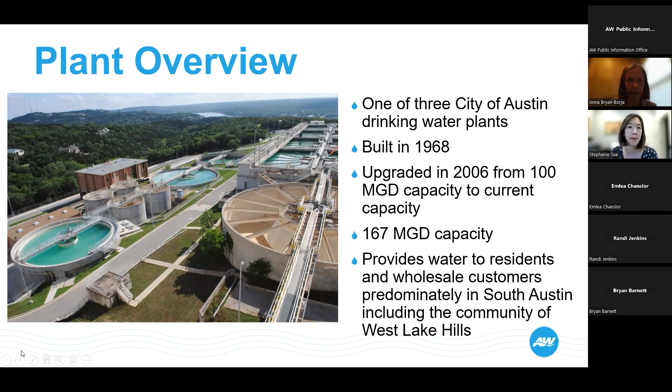So, a quick basin cleaning update. As you'll recall, this is an annual activity that we're conducting on our basins. Our goal is to clean each basin once every 3 years. It's really critical to our operation in that it allows us to ensure that our treatment capability and capacity is upheld, and that the equipment critical to the treatment process is cleaned on a regular basis, so we can use our equipment to its highest capacity.

This is required because we are a lime softening plant. We add lime to our process, and calcium carbonate actually accumulates on our mechanical equipment, and it can harden and get thick. So our goal is to continue to maintain it regularly and clean the basins frequently so that we're able to maintain our treatment capability.

Last year, we cleaned basins 1 and 2. That was at our last meeting with the community out at Ullrich, back in October, before we started cleaning Basin 2. We successfully completed cleaning of those 2 basins.

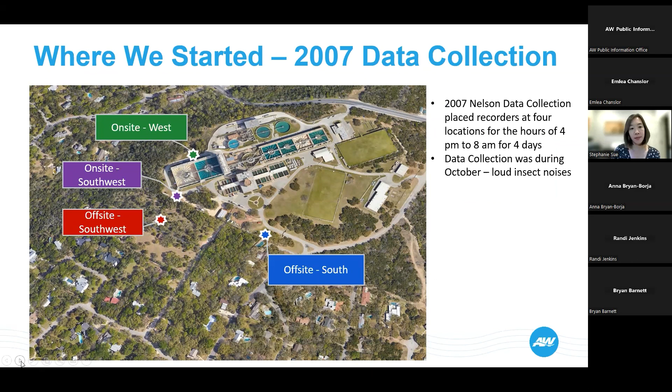4 days of data were collected from the hours of 4 p.m. to 8 a.m. back in 2007. This data collection was done in October, a slightly different time of year than the current study, and consequently there were quite a bit of insect noises that weren't present during the November study we did.

In addition to the 4 original locations, we added additional spot readings further into the neighborhood. This was to help capture a better picture of how sound was propagating throughout the residences in this area. 3 locations are shown, although many more areas were recorded and provided in that report.

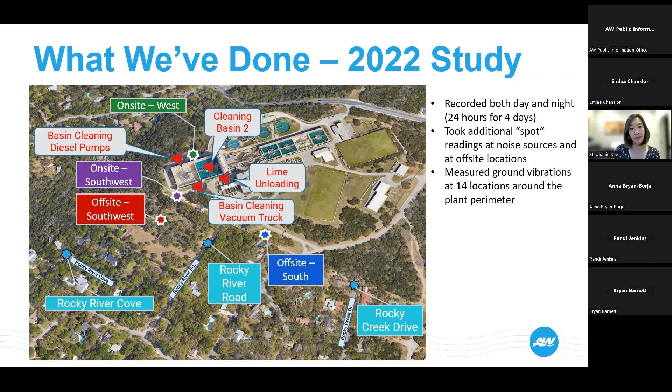We knew there were certain sources of noise due to complaints, so we targeted recording the sources of those sounds. As Stephanie mentioned, there was basin cleaning equipment that we purposefully located on a different side of the facility than previously, but we still recorded the sounds at those equipment locations. There's also corresponding equipment called a vacuum truck that removes the material pulled off or blasted off by the power washing, and we recorded the sounds produced while cleaning basin 2 from up top in the basin.

The only non-basin cleaning point source we recorded was a lime unloading process, both with and without the outdoor truck blower. All that information is conveyed to you in the report, which is more than what we had in the '07 study.

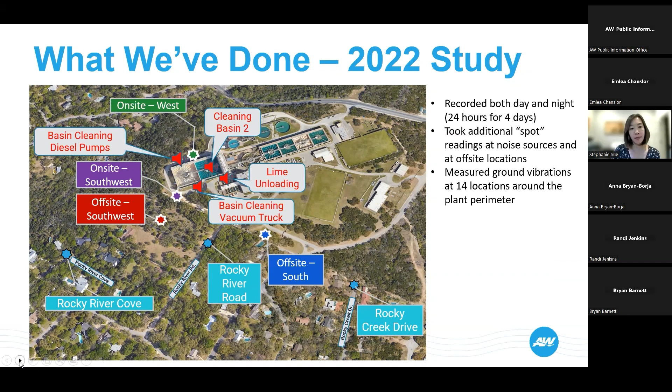So where we're going with all of this is collecting that data was step 1. Step 2 is creating a 3-dimensional model of the plant and simulating how that sound propagates. This model will allow us to test virtually different mitigation techniques so that we can find the most effective ones and prove to you that these activities should be helpful in reducing our impact.

And then finally, we're going to produce a final report that not only summarizes the noise data that we've collected, but also the recommendations for us. Those might be a mixture of operational changes or capital improvement project changes. So with that, I'll turn it over to the modeling team.

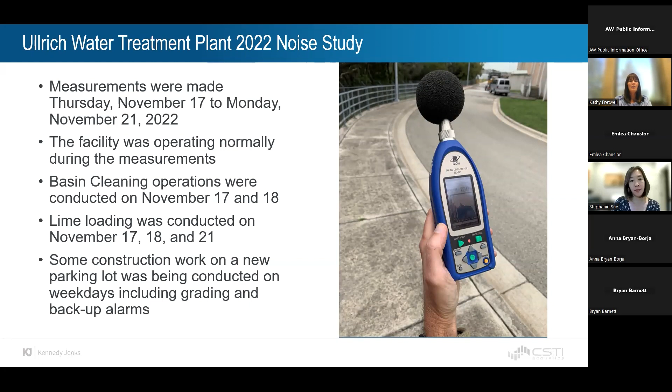Now I'm going to turn over the presentation to Arno to talk more in depth with you about sound.

Hello. I'd like to start with talking a little bit about the physics and definitions of sound. Sound consists of propagating variations in air pressure that occur at different frequencies and amplitudes. The frequencies are measured in hertz, and the amplitude or volume is measured in decibels or dB. The A-weighted sound level is abbreviated as dBA, and that's a single number rating of the loudness of sound at all frequencies and is used in many noise ordinances.

Sound levels often vary over time, and this can be described by measures such as the maximum level, Lmax, minimum level, Lmin, or equivalent average level, LEQ. Typical sound levels can range from a whisper at 30 dBA to a loud dance hall club at over 100 dBA.

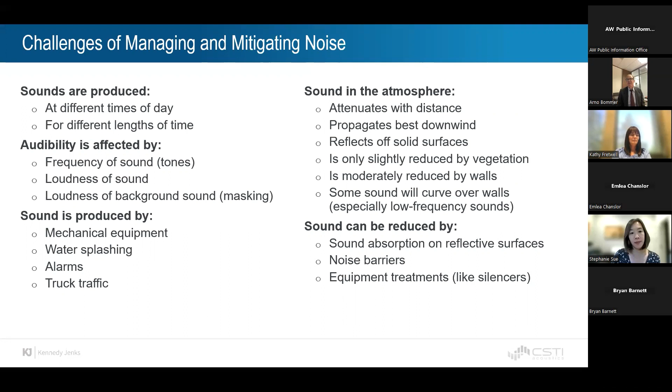People perceive sounds in different ways depending on factors such as the time of day, the presence of tones, the loudness of the sound, and the loudness relative to the background sound. Sounds at the Ullrich site are produced by a variety of sources such as mechanical equipment, water splashing, alarms, and truck traffic. Sound levels in the community are affected by the distance from the equipment, wind conditions, reflections, and walls. Sound can be reduced by sound absorption, noise barriers, and treatments to equipment like silencers.

The Ullrich Water Treatment Plant is located within the Austin city limits and shares a property line to the northwest and the southwest with the city of West Lake Hills. The nearest residents to the plant are within the city of West Lake Hills. Austin Water owns the buffer property outlined in blue dashes within the city limits of West Lake Hills.

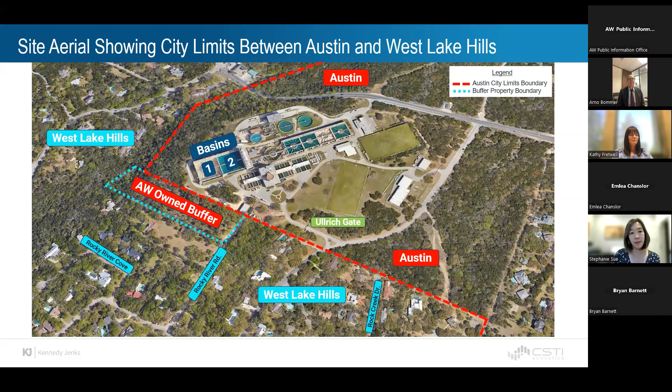For noise criteria, the Texas state noise limit is a decibel limit level of 85. The City of Austin's Code of Ordinance states that the noise level of mechanical equipment may not exceed 70 dBA at the property line. We were unable to compare sounds from the treatment plant with the City of West Lake Hills criteria, as the ordinance uses frequency bands that cannot be measured with modern calibrated sound level meters.

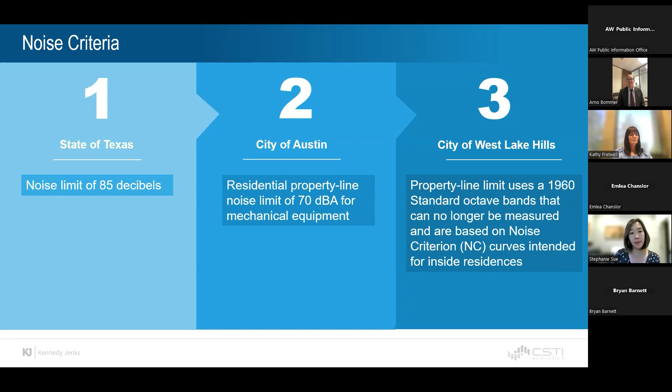Several sources of noise have been identified during normal operations at the Ullrich plant. Small motors are used for basin mixing and stirring and for water transfer pumps. Basin discharge waterfalls produce a flowing water noise. Noise impacts from transportation sources include trucks that arrive to deliver lime and remove sludge from the facility on a regular basis. Some vehicles in operations are equipped with backup alarms that periodically sound.

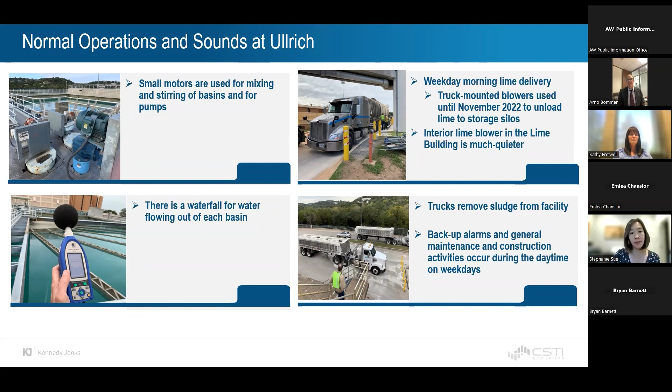Routine maintenance and ongoing construction activities occur during the daytime hours on weekdays. Transformers and HVAC equipment also produce noise during operations. Through the treatment process, lime scale accumulates within the basin and on basin surfaces.

To maintain operations of the system, each basin requires periodic cleaning conducted by a specialized contractor to remove lime scale. The pictures shown here highlight the process for basin cleaning. Contractors spray water at high pressure to remove the lime scale. The equipment is shown in the lower left.

The water is pressurized with diesel-powered pumps, with up to 4 pumps running at a time, shown in the center. The water and scale residue are then pumped from the bottom of the basin using a truck-mounted vacuum, shown on the right.

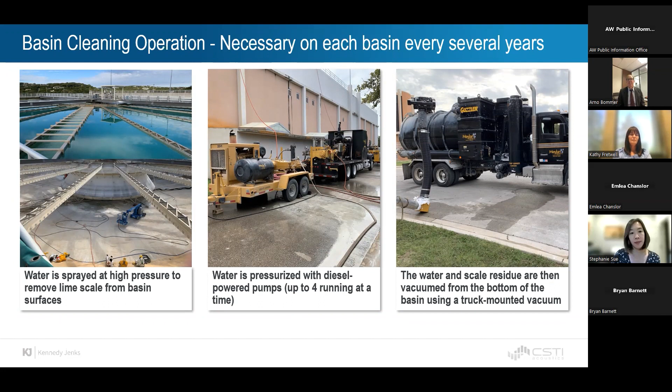The sound monitoring was conducted at the same locations as the previous study. On-site west is north of Basin 2, near the diesel pumps used for basin cleaning. On-site southwest is near the fence by Basin 1. Off-site south is near the Ullrich Gate, and off-site southwest is located in the Austin Water-owned buffer property.

For the 2022 study, we completed continuous sound monitoring measurements at these 4 sites for 24 hours per day for 4 days, in comparison to only nighttime hours from the 2007 data collection.

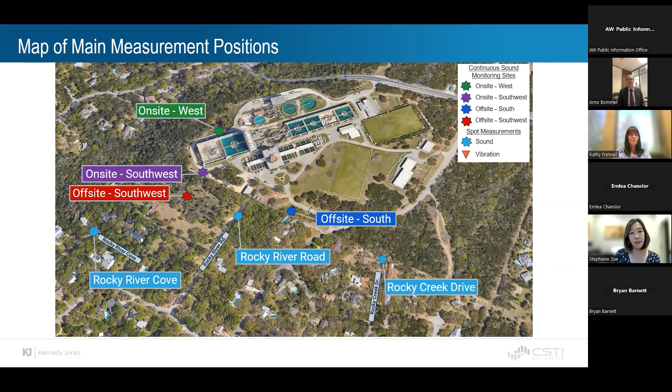Additionally, spot measurements were made, including off-site positions at Rocky River Road, Rocky River Cove, and Rocky Creek Drive, shown in light blue. Ground vibration levels were measured at 14 positions around the property line of the site to assess possible vibration impacts. This is shown with the red triangles.

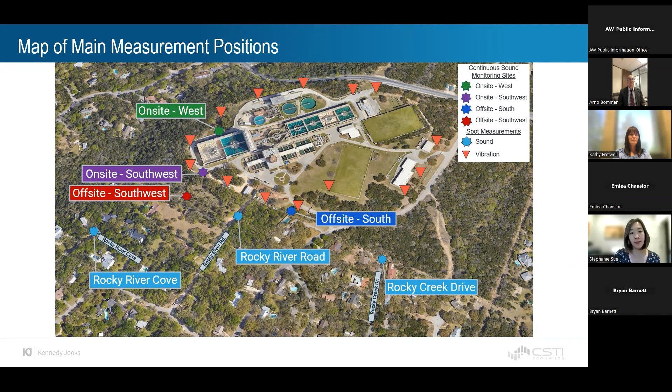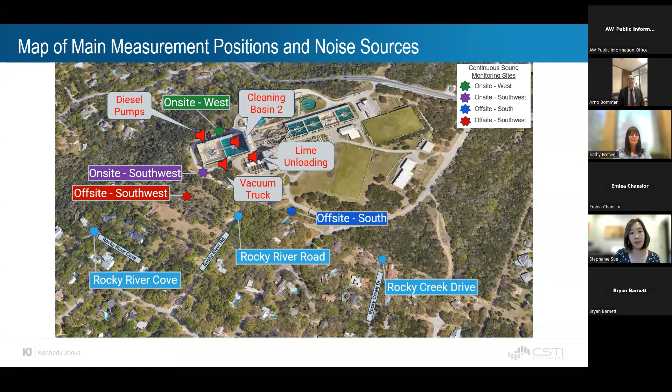The loudest sound sources measured during the 2022 study were all near cleaning Basin 2. These included diesel pumps for the basin cleaning, high pressure spraying to clean Basin 2, the vacuum pump for the basin cleaning, and lime unloading, which is the only operation unrelated to basin cleaning.

We measured lime loading operations conducted with the original process using a truck-mounted blower, and with the current process using a blower inside a building.

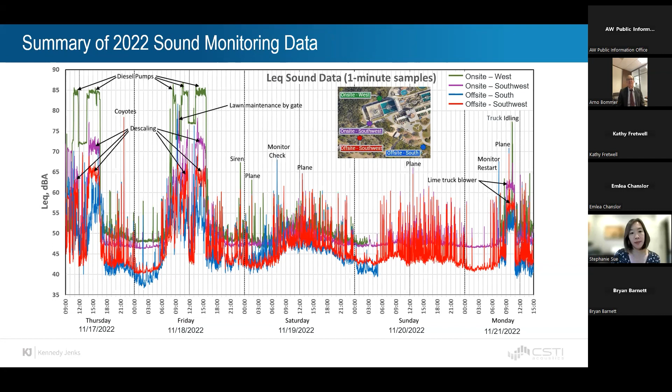On the right of the graph, you can see sound levels from testing with the blower on the lime truck. As shown with the red line, it produced a sound level of about 57 dBA in the buffer property. When there are no sounds from basin cleaning or truck lime loading, and when the brief spikes from planes and sirens are excluded, the sound levels at all 4 locations are typically 50 dBA or below.

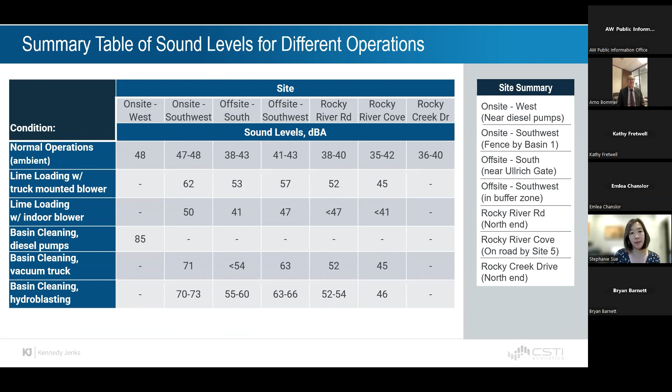As previously noted, the 2007 data was for nighttime only, from 4 p.m. to 8 a.m. each night, and was collected in October when there was insect noise at night. In 2022, data was collected continuously to cover both day and night in November during cool weather without insect noise, and included normal operations and basin cleaning operations. During normal operations, without insects or planes, sound levels at the four monitoring locations were similar for 2007 and 2022.

This figure shows the sound levels measured along Rocky River Road and Rocky River Cove during basin cleaning operations. Sound levels range from 46 to 56 dBA and generally decrease with greater distance from Ullrich. Sound levels may also decrease due to shielding from buildings and topography. There are some effects from foliage and ground absorption, but these are normally minor.

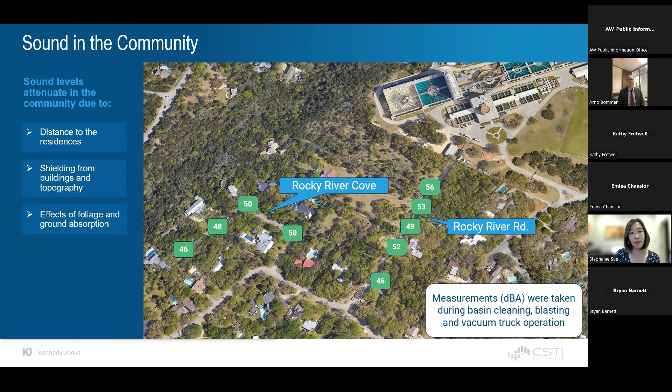Here we show the difference between sound levels 30 feet from equipment and the level measured at the monitor in the buffer area. There's a decrease of at least 27 dBA for each event, corresponding to over an 80% reduction in perceptible sound. Additionally, the indoor lime blower reduced noise from the lime truck unloading operation by about 10 dBA compared to the truck-mounted blower. Functionally, this represents a 50% reduction in perceptible sound and a 90% reduction in sound energy.

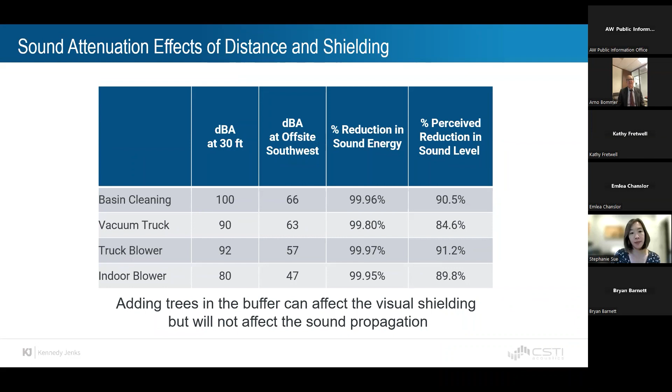Next, we're going to talk about vibration. The City of Austin's Code of Ordinance states that earthborne vibration may not exceed the limits shown in the right-hand table at the residential area boundary line. The City of West Lake Hills Code of Ordinance limits any vibration to 0.002 G's peak measured at any point beyond the lot line.

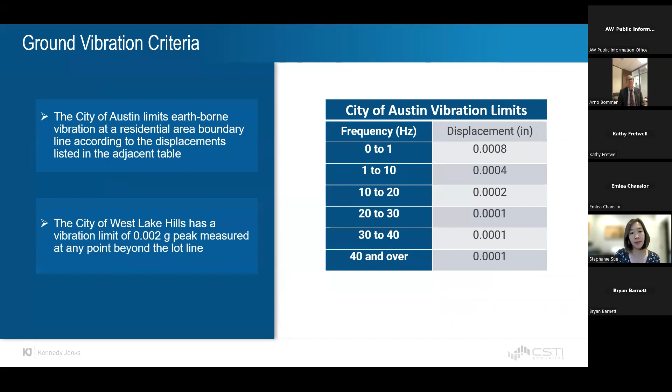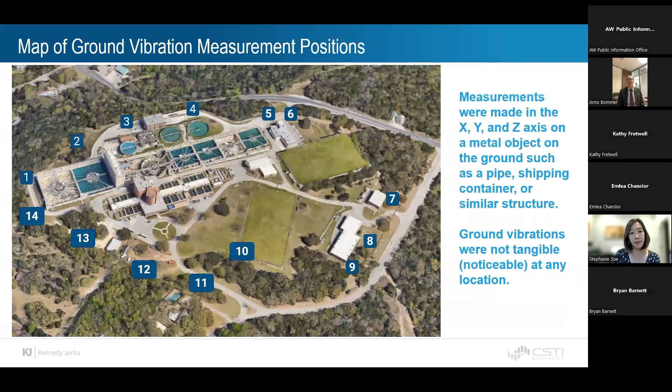Ground vibration levels were measured at 14 positions around the property line of the site to assess possible vibration impacts in the vicinity. Measurements were made in the X, Y, and Z axes on a metal object on the ground, such as a pipe, shipping container, or similar structure. Ground vibration was not noticeable at any of these locations, and no ground vibration readings had been taken as part of the 2007 data collection.

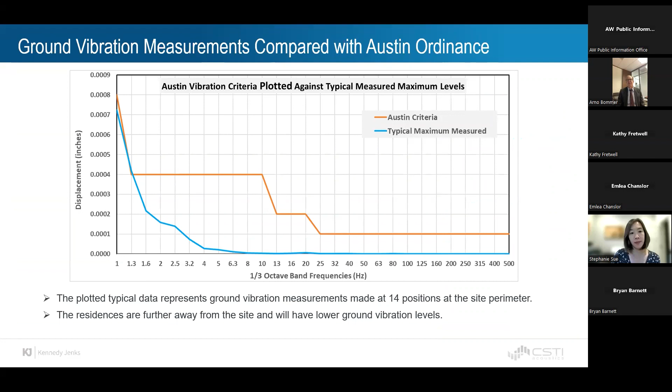In conclusion, the 2022 study observed that typical sounds from the Ullrich facility measured at the buffer property, offsite southwest, ranged from 42 to 66 dBA, while the Austin noise limit is 70 dBA. The indoor lime blower reduced noise from the lime truck unloading operation by 10 to 12 dBA. Functionally, this represents a 50% reduction in perceptible sound and a 90% reduction in sound energy. The Ullrich facility meets all applicable noise and vibration ordinances. Austin Water's next step on this project will be to conduct 3D computer noise modeling to assess methods to further reduce sound.

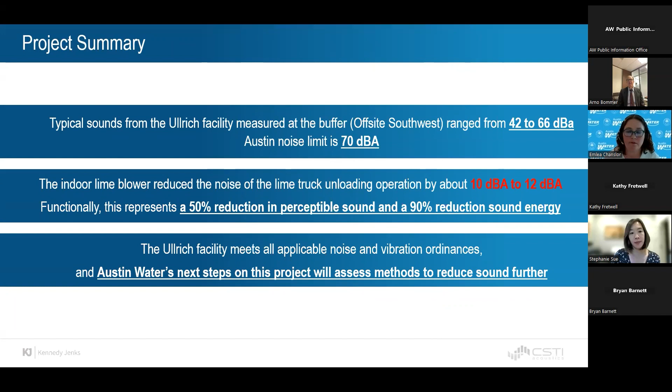I see that we have one person who's joined by phone, so I want to let you know that we will give you an opportunity to raise your hand and speak if you'd like. We wanted to start by getting some feedback. So we now have data about the sound around Ullrich, but we would like this consultant team to hear directly from neighbors, and so I've just started us with a question.

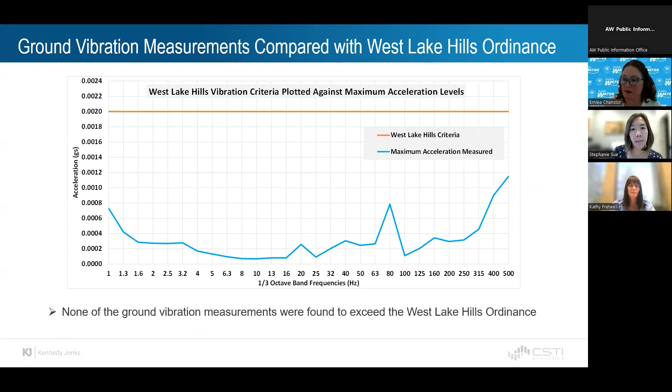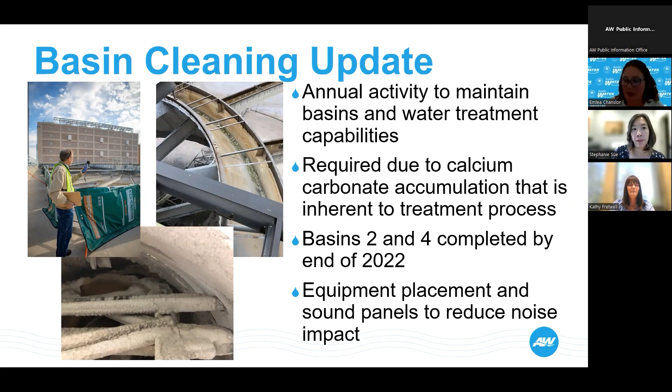I'm just pausing here to see if there's more questions coming in or more folks who'd like to speak. I think Anna helped us get a recap on the next steps, but Kathy, I'm going to ask you to do that before we close the meeting, if you would. And Brian and Charles, if you want to contribute, maybe get yourselves ready for that. I'm just waiting to see if there's other questions or other folks who want to speak.

Doris says, I think more can be done than a 4-foot panel, question mark. I would chime in and say that Austin Water agrees that more can be done, and that's the purpose of the 3D model, so we can evaluate the best solution for the different sources of noise. That way we don't invest money or time in a solution that isn't going to deliver for the community that surrounds Ullrich. So we agree with you, more can be done, and that's what we're here to talk about. So I think that's great, yeah, walk us through next steps.

We have another question, Kathy, before we get to that. John says, are there still day versus night allowable noise levels?

I think that's maybe going to the regulations. Kathy, or Brian, or one of you, who's best to address that? I think Arno has spent the most time looking at the codes, so I think he can speak to that.

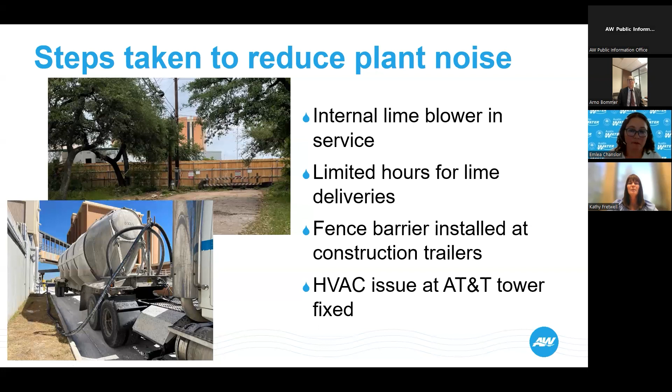Once the modeling is complete, we'll produce a report, which I think will also be shared with the public, and there will be another presentation on that modeling effort.

That's right, Kathy. We certainly intend to come back to the community with that information, and we're always available for dialogue, for a phone call, or we'll respond by email. Tonight we had our full team together for this presentation and Q&A, but we're always here and always available. We do have another question.

Can you assure me that the vibration monitor was on from 11 p.m. to 5 a.m.? Doris says her daily log showed it was loud Tuesday and Wednesday, November 14th and 15th. So Arno, I think you mentioned the vibration measurements were done, not monitored over time, but at a particular time. Were they done during the daytime or at night for those vibration monitors?

That was just during the day for a period, getting all the data for all those positions over several hours. So there was no long-term continuous monitoring of vibration, just spot measurements. So, we haven't done long-term measurements like we did with the sound.

I guess additionally, on the 14th and 15th, that wasn't part of the study. The study started on the 17th, running from the 17th through the 21st. So if there was something specific happening on the 14th and 15th, that wouldn't have been captured, since the study started on the 17th. Thank you for providing that information.